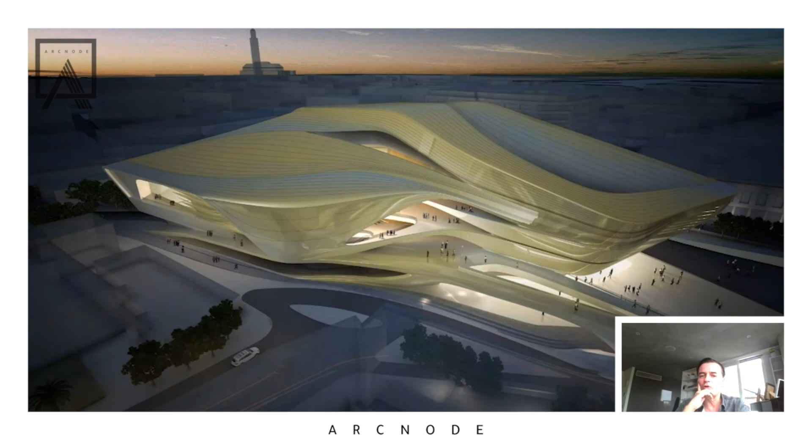So I wanted to start—I suspect nobody would know this project. This is actually in Morocco, a sketch and scheme, a competition entry for a new concert hall / opera house, the Grand Theater for Casablanca. You can see a multi-layered ground, two volumes. You enter at the corner, and the two theaters were located on either side.

So that's just a few sketches. We lost this competition, but soon later there was another. This project actually never happened, and then there was a decision made to move the opera house to Rabat, and I'll show you later that we actually won that scheme. Amazing.

Some glimpses, but also, this is a time when the Middle East had this fantastic renaissance. Dubai was the pioneer nation that modernized in the Middle East, and showed that the Arab world could compete at the highest level with the first-world modern city and society. So at the peak of the boom period leading up to the 2008 collapse, those few years were amazing. So we won the competition for Dubai Opera House, and there is a hotel in the foreground.

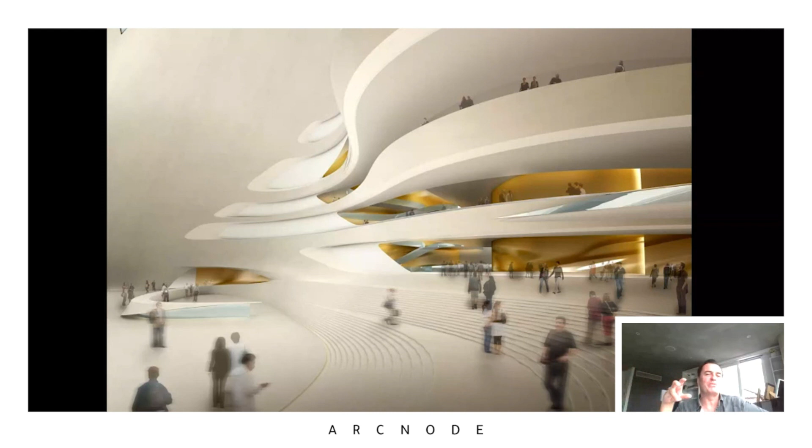So this has been a while ago, and Abu Dhabi next door was also pushing forward. This is actually something which might still happen—this is Saadiyat Island. In the meantime they've built the Louvre, and there's also a new Guggenheim in planning, a Foster building, and this was the biggest of all the new icons on Saadiyat Island. We won the competition for the concert hall or performing arts center with 5 different venues, with a great atrium we put forward—it was the most extreme design with all these terraces, cantilevers, and structures.

But also with a fantastic high-level glazed concert hall, because in concerts you don't need a dark space, you don't need a typical theater enclosure—you could have that concert in bright daylight, and that is our proposal right at the top of that project.

Now, this one some of you might know because this is Petra, and you can see here our interpretation of some of these beautiful erosion forms. Later on you see this form reoccurring, and this idea of canyons, strata, and erosion became the theme for our proposal for the Grand Theatre of Amman.

This is also a concert hall project with 2 halls, and here you can see that big block in the valley, beautifully located, with that fantastic carved-out erosion of that big stone block, which generated a lot of interesting lobby spaces. In this case, we have a smaller concert hall up here and a bigger concert hall partly submerged here, with a high-level lobby with a skylight.

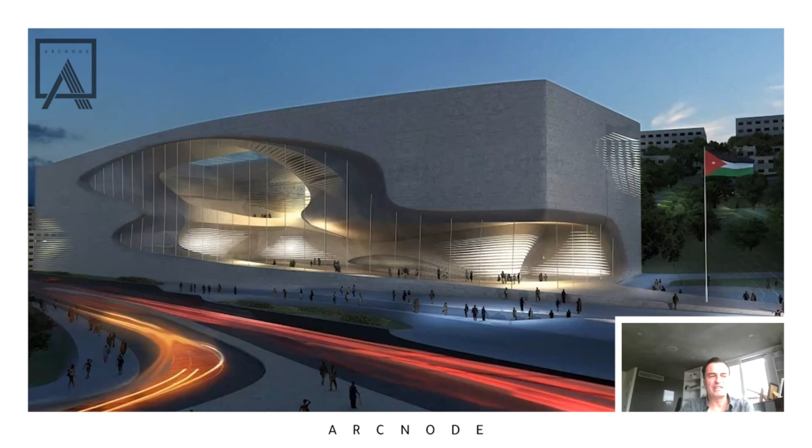Unfortunately, Zaha was very sad and devastated. It's just so sad - if you do a competition and lose, that's one thing, but if we spend two years refining and detailing, working it all up, that's another set of drawings we don't have.

Time to look at, but this would have been the main hall, and this would have been the lobby and the balcony into the second little hall, and you work yourself down. There's a sunken concert hall, which I showed you earlier, and this is looking from the top level down.

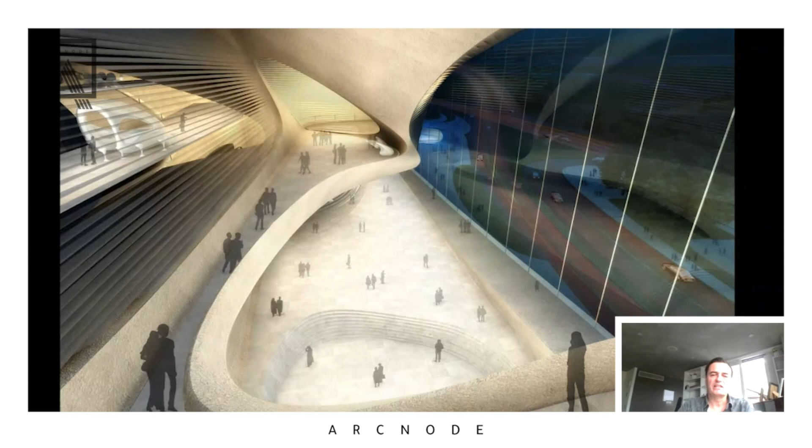These fantastic lobby spaces - so big shame, but a lot of these you'll see more of. The Dubai Opera House was also a shame because we had developed that a lot. Saadiyat Island as well - so a lot of these didn't happen. Some of them might still happen, like Saadiyat Island. This one finally is happening now.

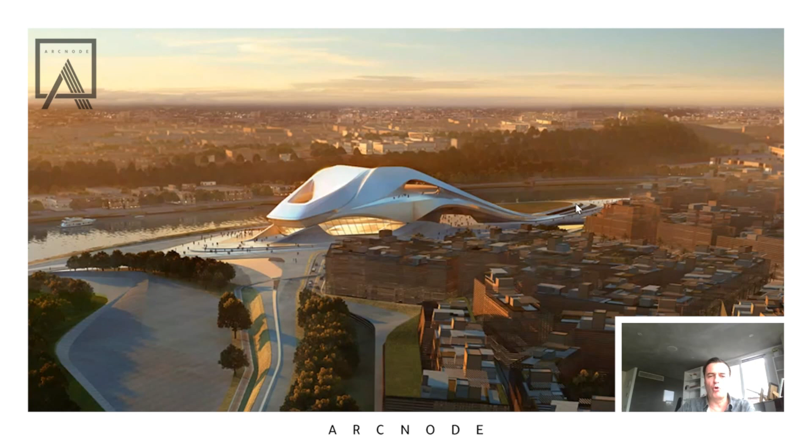This is the Grand Theatre of Rabat, beautifully located on the water. Rabat is a very beautiful garden city. You can see here we have the main lobby entrance, terraces to step out on from the balconies, and actually the stage can open up to the back, with the idea of an amphitheater connected up as well.

Wow, so this is happening. In this case, the theater itself is very faceted. I don't have the latest photos - what I'm showing you now is construction photos, and actually we're a bit further ahead now with that.

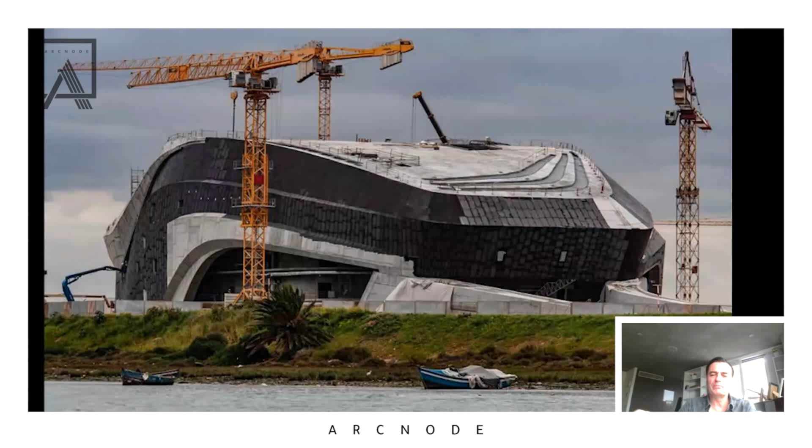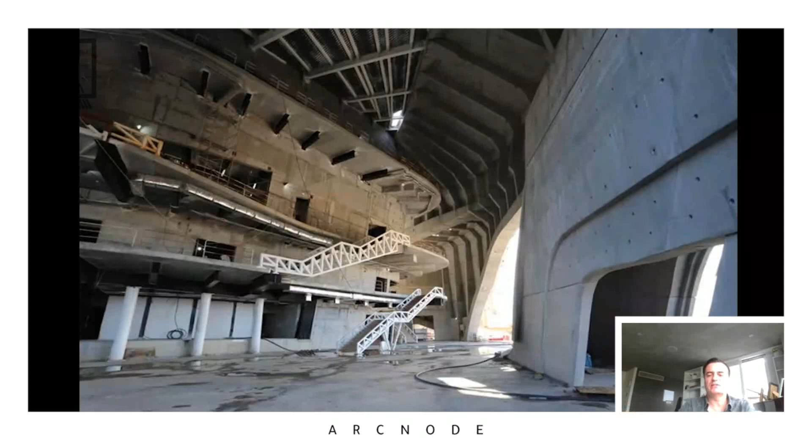There's a mixture of fair-face concrete for these long ramps and structures, and then the cladding is fiber concrete, happening as you can see here. The lobby space with a series of balconies and the great theater space - that will take a little further, maybe over a year, to be finally completed.

Yeah, it will be beautiful on the water. I just threw this in as well because it's the football stadium in Qatar.

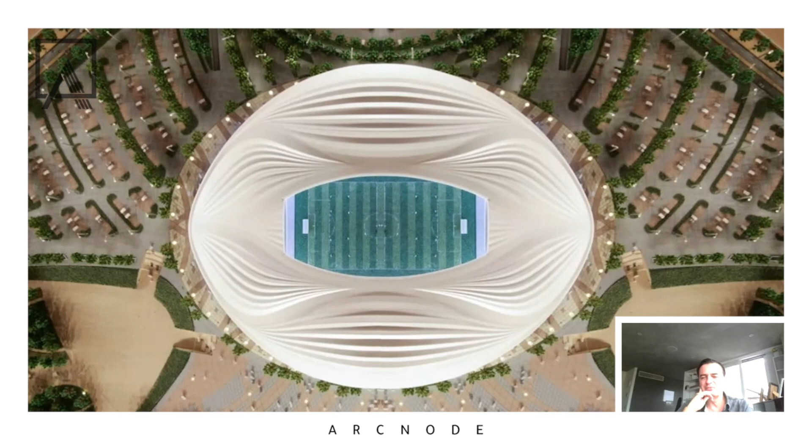So that was the competition design sketches, and then the reality - the beautifully pleated cladding in white aluminum, very beautiful, very striking. And of course it's a big opening, but we can cover that roof. You can see the cables, and you can pull over roof elements there to close it for the heat.

I've been at the opening ceremony and the initial football game already, and you can see here the nice pleating and the mashrabiya patterns at the edge for the lobby area.

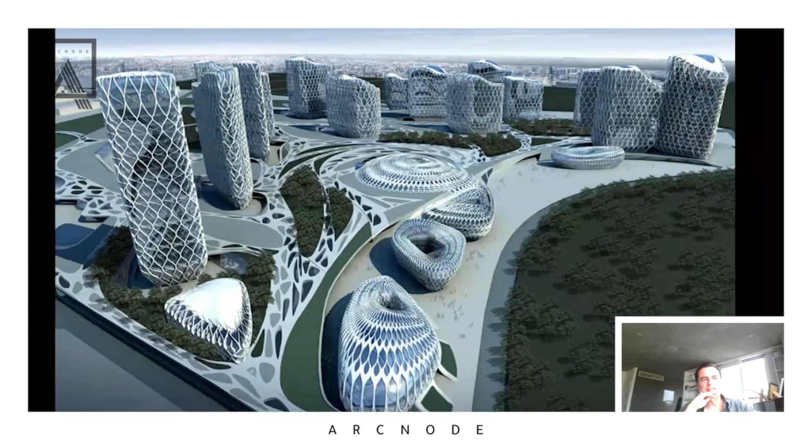So we also did a number of government projects. This was the idea of a whole new government complex in Libya.

I mean, what I find interesting is what happened in Libya and Morocco and Jordan, and also Algeria, Tunisia as well - all of North Africa, I thought, had a fantastic economic spring before the so-called Arab Spring, where there was a lot of ambition and investment. In fact, this was after the financial crisis, which in a way stopped all the boom in Dubai and Abu Dhabi - in particular Dubai, where everything came to a halt. But that was a takeoff moment for North Africa, and there was a lot of excitement. Unfortunately, what I call the real Arab Spring was followed by a political Arab Spring which stopped all of that.

So this is Tripoli in Libya - the idea of a whole government complex. This was meant to be the parliament, with a big dome, and there was a big plate connecting a lot of these ministry buildings. These were other chambers of the parliament, and these towers were all the ministries.

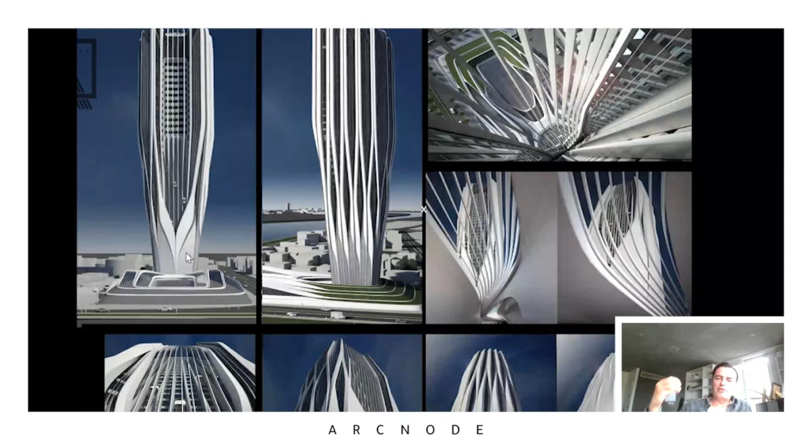And then these structures, the facade, and you can see it down here, is all about shading. In the end, totally shading against the southern light, totally open with the northern light, and then opening up gradually. This is also beautiful, the way you move through the podium and see this tower up.

So I think it's a wonderful tower, and it makes you look forward to its final execution. But we also did a number of sketches for the Iraqi Parliamentary complex on the outskirts with a beautiful garden, and it's part of a master plan with a series of office buildings and a number of parliamentary chambers. There's also 2 main chambers, but also secondary halls.

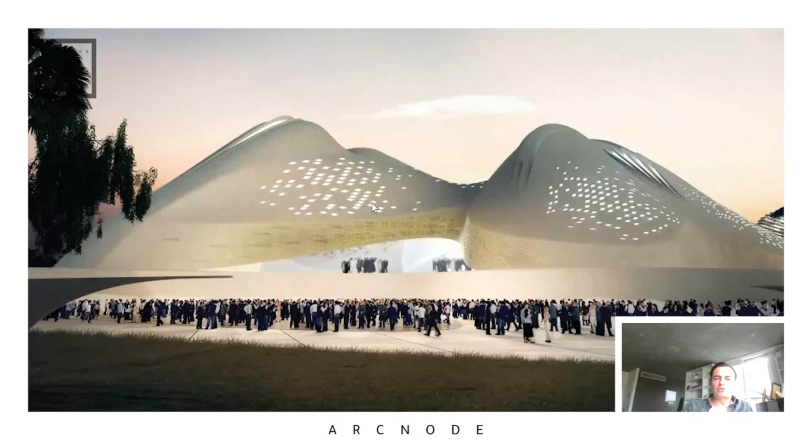And that is our sketch using these domes. You can see here in a larger envelope a series of smaller volumes articulating the different chambers, using filtered light. And this is the way you look at it from the office buildings behind, overlooking the parliamentary chamber.

We also did in Iraq again a competition. I only have one image here. This was on the river as well, on the Tigris. The offices of the Prime Minister.

So something which has some of the axiality and elegance of the government complex, it has traditional features, but it also has a very contemporary lightness of efficient shell structures. And so we did a number of those government buildings.

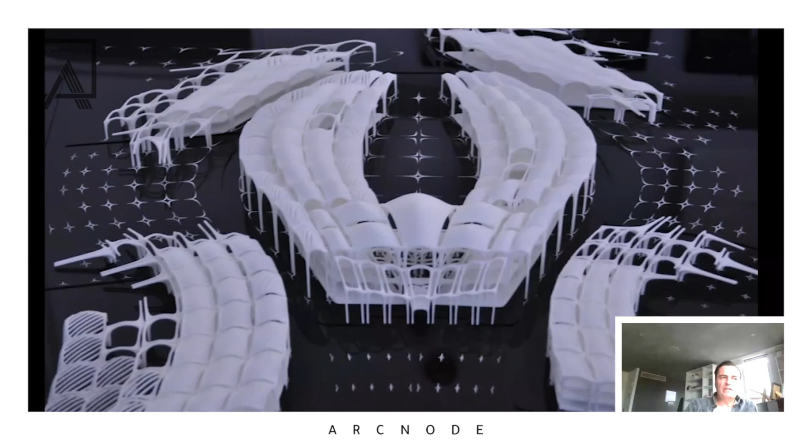This was a proposal for a parliamentary building also for Dubai. It's also built on this idea of layers of shells. Sometimes you find in mosques a whole field of shells and a kind of hierarchy and cascade of those overhanging to the side, to give a lot of shading to multi-story offices behind, and a beautiful main plenary hall with these kind of layered structures.

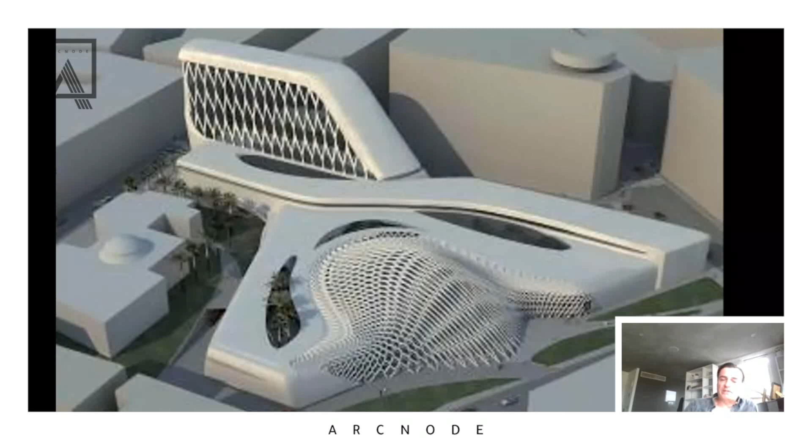So we've done a number of those. We've done this one, we've done one for Tripoli, and I couldn't find now the actual hall. And we've done a beautiful one for Syria. From Syria, I can show you the complex from the outside, but all of them also had the beautiful interior hall. So this is the Syrian Parliament building which we proposed. There's an existing small Parliament building which we connect up to.

This was the ministry offices in the slab, a series of courtyards, series of chambers around, and this was a big dome hosting the actual parliamentary hall. You can see how small this one was, a hall, and then also covering a lobby area in front. Unfortunately, all of these projects didn't happen and might come back.

So I just wanted to show you, out of my archive, what we've done in all of these countries, in what I call the real Arab Spring - and now to make a political statement - which kind of finished, or in a sense was spoiled, by impatient uprisings. If we had actually waited a little bit more, you could have seen prosperity spreading around. But of course, it was an era where you had investment flowing in, and initially, of course, not everybody was participating, and that built up some tension.

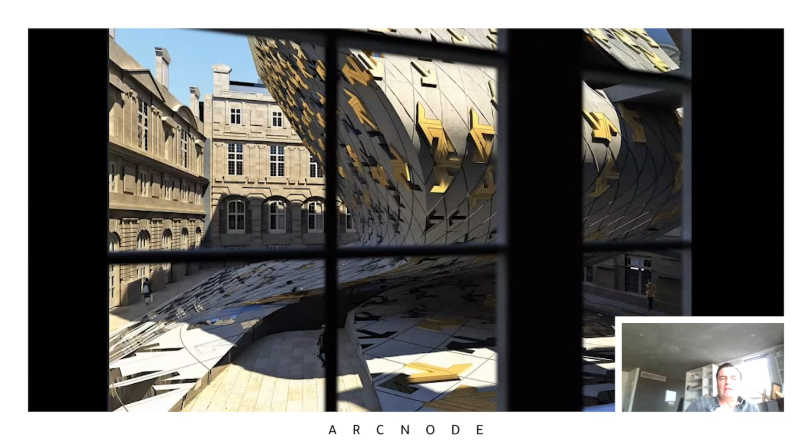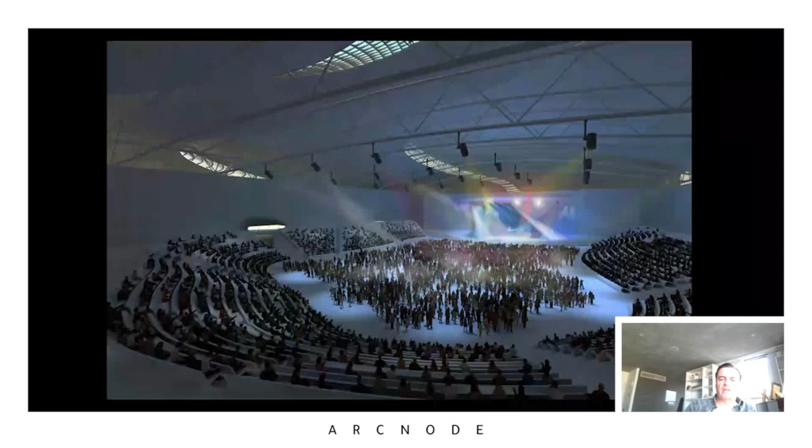And this is some of the images of the Expo City. Again, this was a real project, commissioned, developed beyond the competition. At the same time, we did in Egypt stone towers.

This is part of New Cairo, a very large complex of towers meant to house multinational corporations and local firms, including a hotel and residences, but mostly an office headquarter cluster in New Cairo.

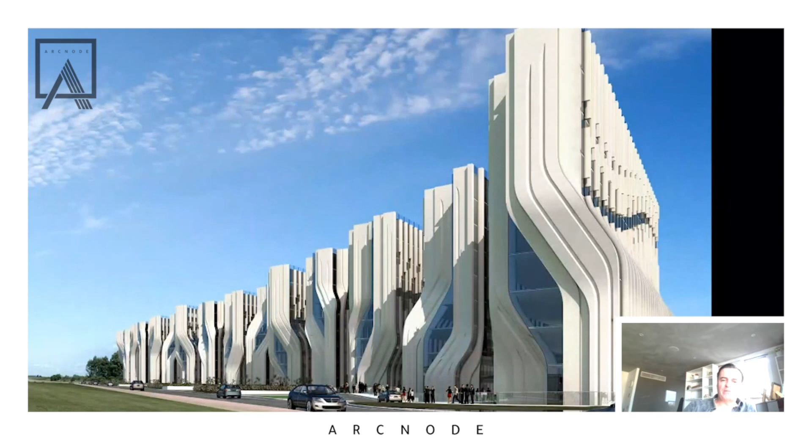The typology is quite interesting. Always two of these slabs come together around an atrium, with a small gap and another two. All together this generates this beautiful frontage.

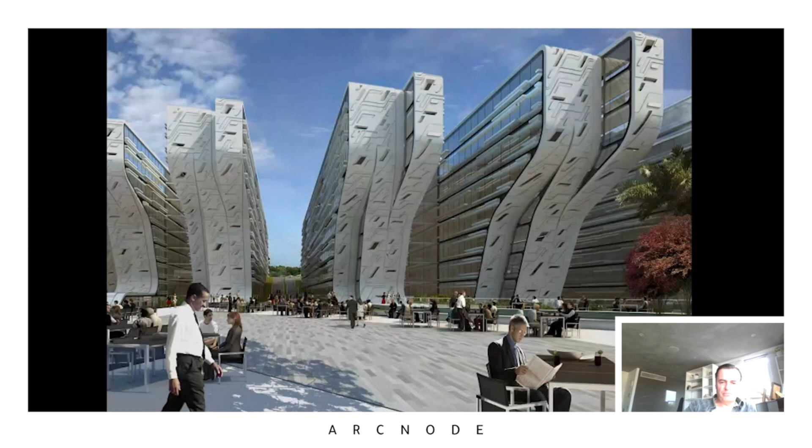Then as you step behind, you move through into the sunken valley. We went down a number of levels to gain height and area, generating this wonderful valley with a lot of retail, a hotel, and office spaces. There's a sunken plaza condition inside, with ramps, balconies, and a lot of outdoor space.

This was at the time the largest project we'd ever had, nearly amounting to one million square meters. This was on a scale we only operated at otherwise in China, where we do very large projects. You can see how far we actually cascaded down to gain height and area.

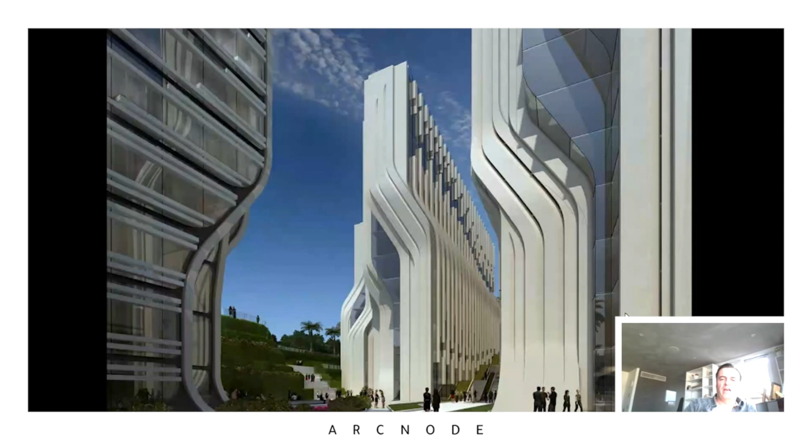This is maybe one of the projects where we've spent the most intense of our design efforts ever. This is the Green Hill of Algiers, Algeria, the presidential palace. Actually, the presidential palace is up here right now, so this would have been the new presidential palace and presidential residence, separated by a garden, a big ceremonial forecourt, and another cluster of ministry towers. It's a major complex and beautiful palace with large halls and a lot of spaces.

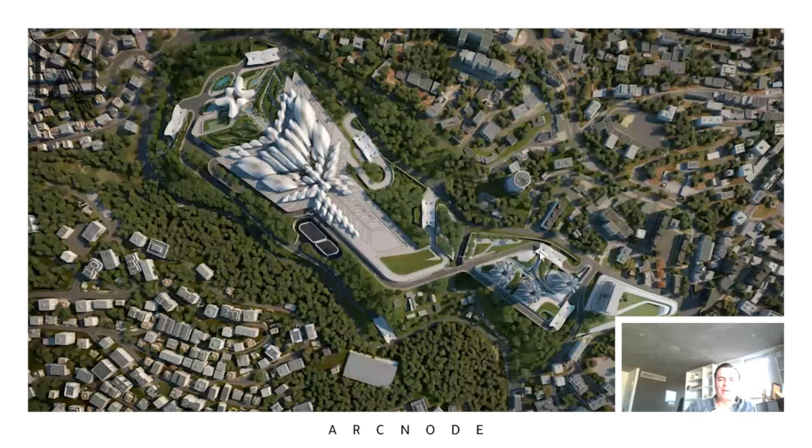You can see it here as well. This is something where we went all out on a more ornamental approach, but these are also high-tech, lightweight concrete or super thin concrete shells, everything heightened to become a beautiful, festive, ornate structure, because the ribbing pattern, which was structurally active, at the same time also became an ornament.

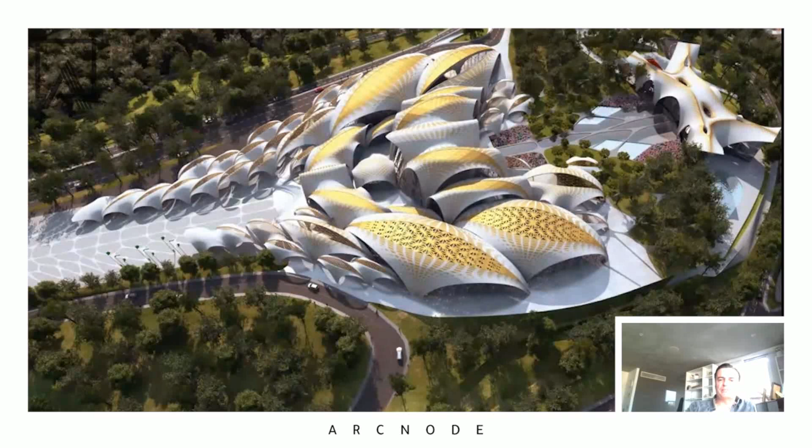Some of these are very large shells, and we left gaps between them to gain some light into the middle, not only at the edges. This structure is the presidential residence.

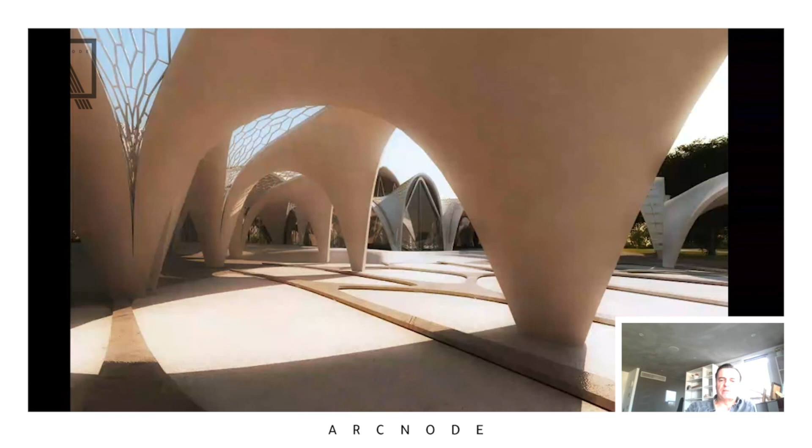I don't have details of that, but this was some of the approaches. You can see here some of the ornamental treatment of the interior and exterior. We had the idea there would be light windows, but also tiling and different color tiles and patterns on the inside. Big atrium, multi-level, with this beautiful feature of the column moving through a hole.

This kind of cluster columns you find in Gothic cathedrals. This was an unbelievable effort in terms of 3D complexity.

Some of the cruder earlier versions of some of the spaces show you how we tried to vary the tectonic elements, but as always the ribbing flows and channels the forces to the support points. You want to generate a sense of lightness, and in terms of the big glass areas, the reinforcement was following a geometric pattern.

Looking at it from the back side, from the vista, the residence also had a beautiful top level courtyard.

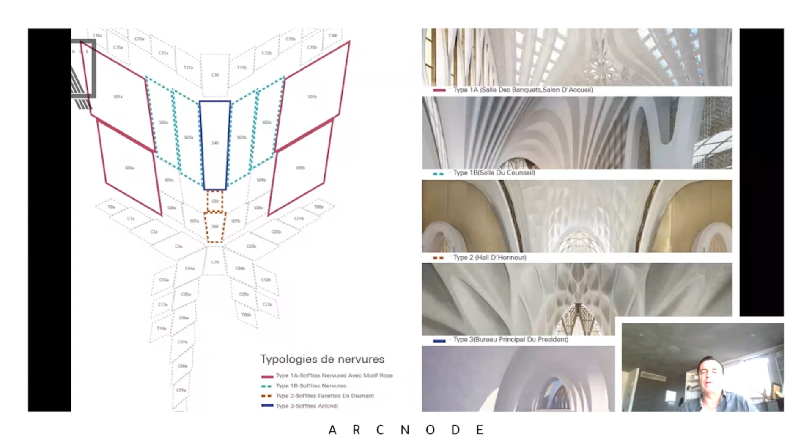This is about the facade, the facade overhang, the relief of the facade structure, and as well shading elements.

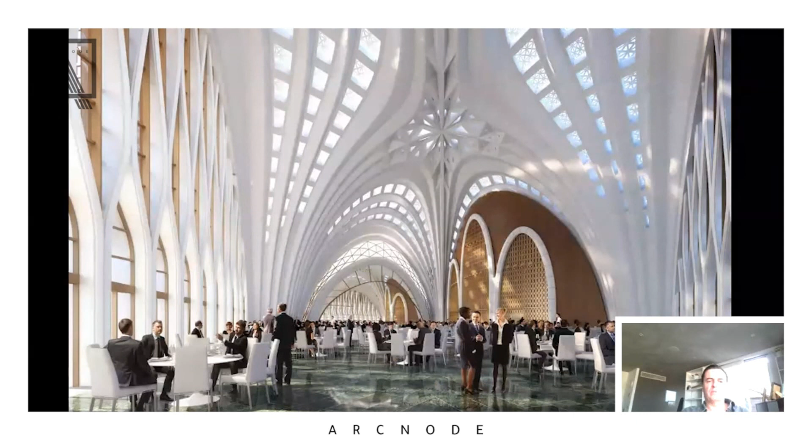You can see some of those spaces and the main hall, the way the shells were connected with glass. And this is the main atrium, circulatory atrium.

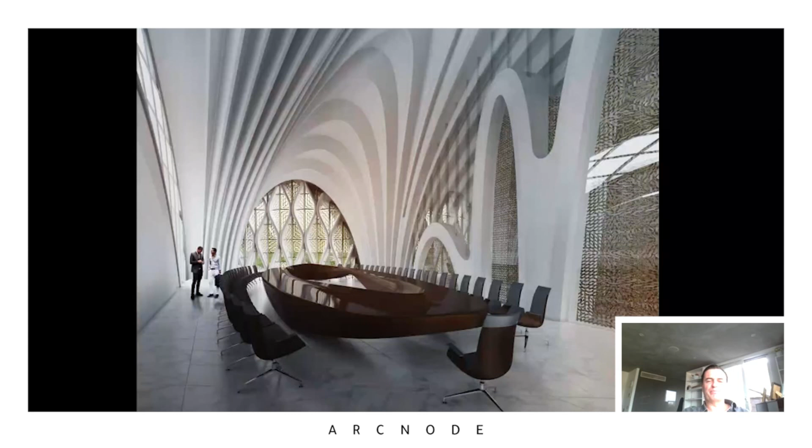So we went all out. Every single room was detailed in this way, including some of the furniture. This is a big conference table. We detailed it out with the concrete shells, the cladding, the glazing, everything ready to go as well.

Unfortunately, the president passed away, and in his later years when he was very ailing, we never got the go-ahead with construction. Sadly. So one more of those. Now I just want to show you also a few towers.

We have proposed this one in Tehran, North Tehran. Unfortunately, in Tehran the political conditions are not very good, and Iran is facing a lot of sanctions and restrictions, so we couldn't do this one.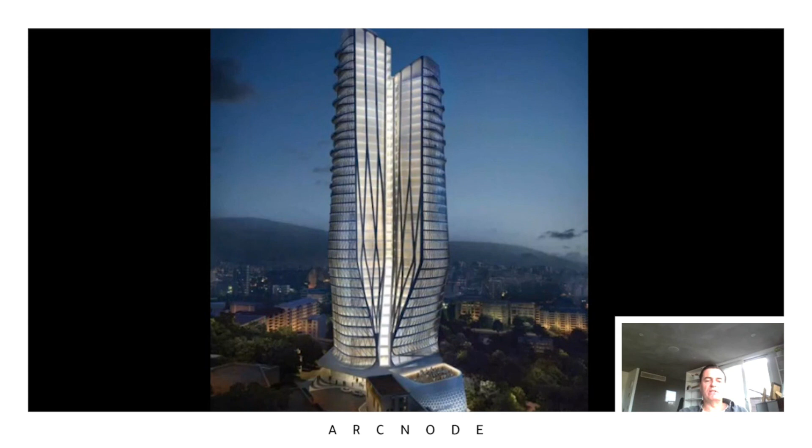We won another major tower complex, also in Tehran, and we did this when there was a window for a short period where there weren't any sanctions. That's for a private client, very close to a beautiful park next to the Russian embassy in northern Tehran. This is actually going ahead, happening now. It's a very tight, very steep site - a hotel and residences with a retail podium, which will go forward.

Our other Iranian project didn't happen. In this one it was also difficult to stay on top of it, so we're relying on local execution, and we can't receive any money from Iran, so it's a wait and see whether it will actually be true to our design, whether we can own up to the project or not.

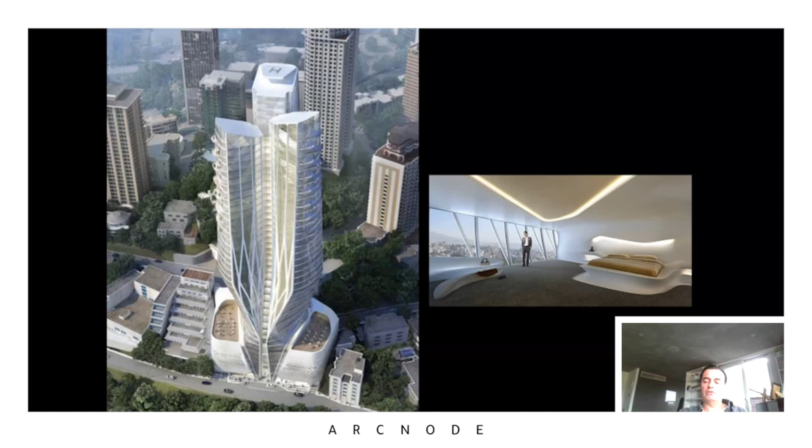We've done a number of schemes, and many more. The way it goes with firms like ours, what we're building and what gets known to the outside world is just the tip of the iceberg of our work. There are many more projects we've done for Qatar, for Saudi Arabia, concepts for Abu Dhabi, etc.

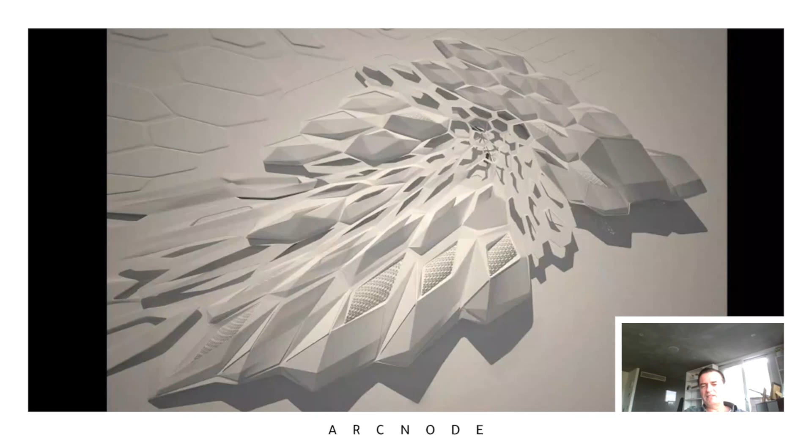This is one you know has happened - a beautiful research center in Riyadh, the King Abdullah Center. I just wanted to show the models we created, and you can see already here that the tilted courtyards shade against the south, bring in light, and capture the wind as well.

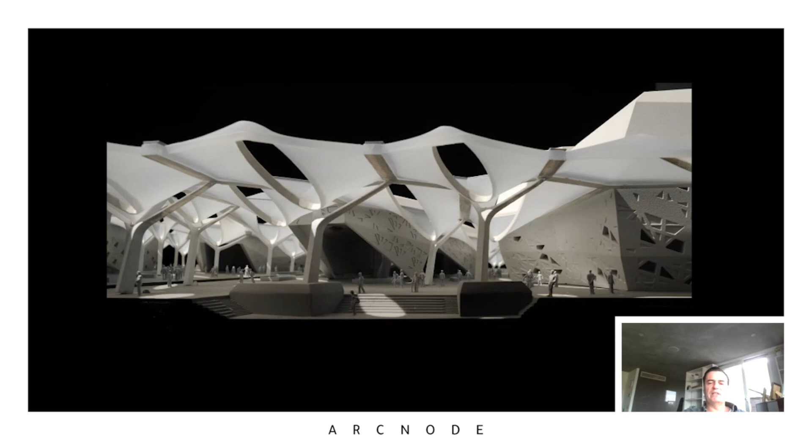And then we have similar features with the canopies. So this was the idea of keeping out the light and bringing in the wind into these courtyards, and then staggering them in height. And then the similar tilting of the oculus and all the shading elements so that the wind flows in and the sun stays out, which unifies the image across the tensile structures and the solid structures.

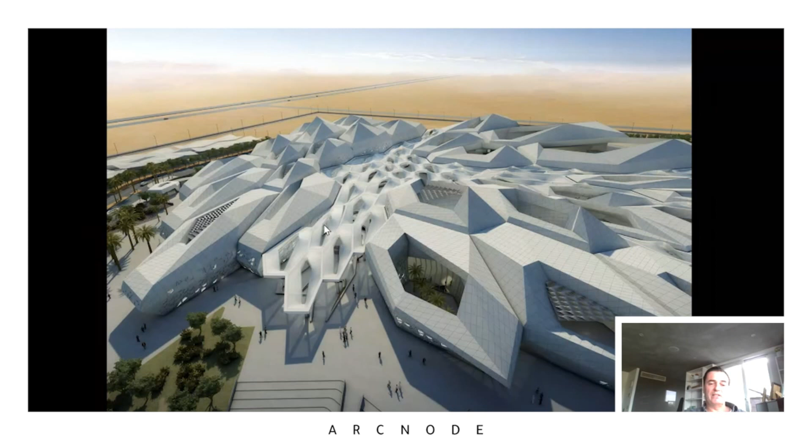And every perimeter facade has deep cut small windows. So all of these are also windows, but you will not have any solar gain reaching into the buildings through that.

So I think it's a very successful project. I've been back a number of times, gave a lecture there. We had the Saudi Design Week event here as well. So it's become a major public building in Riyadh.

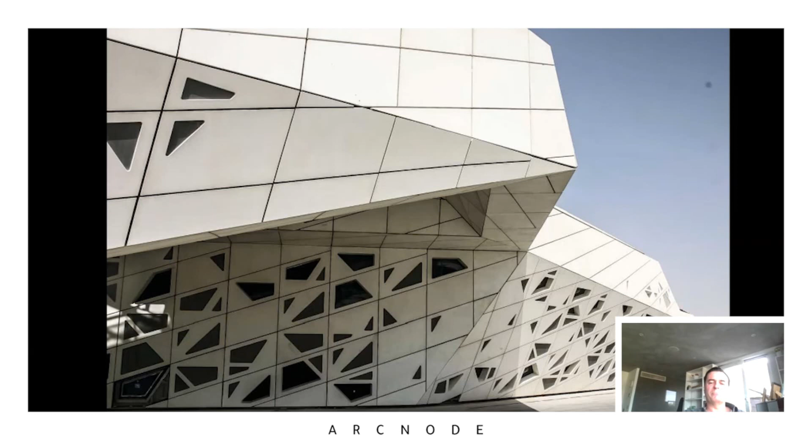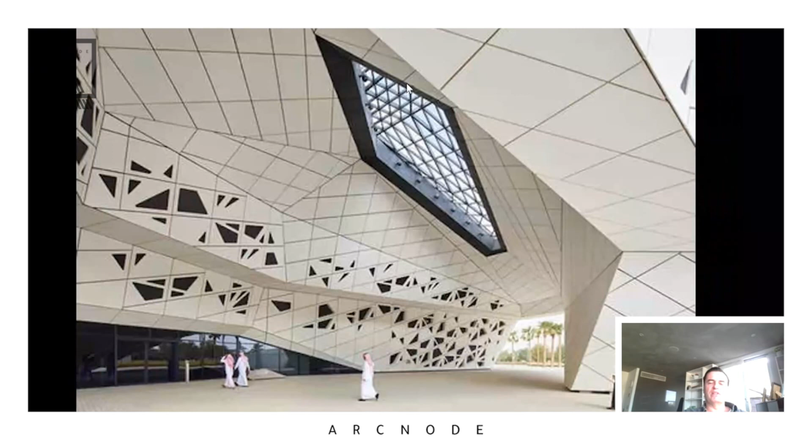So this is some of the entrance situations. That's where you can drive in, drop off, kind of open with a skylight for the entrance. This is where you walk in between some of those volumes underneath the canopies. I'm pausing here, so you can see that some light is coming through.

Very nice picture. Thank you.

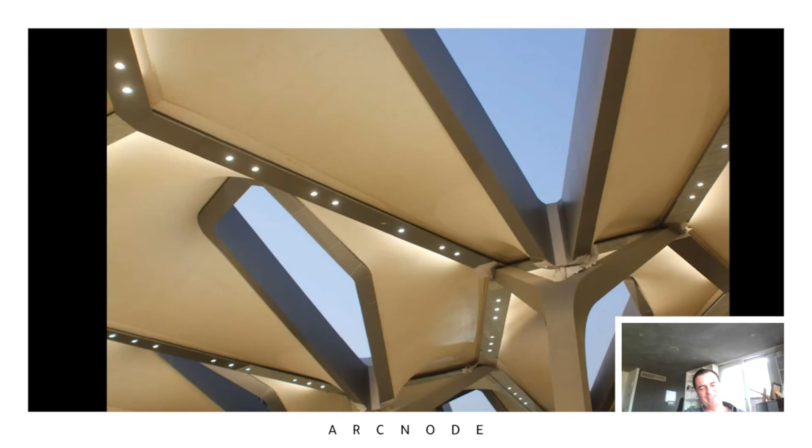And it's so nice. So this is also kind of tensile, it also shades. This is a very geometric building, but you can see the climate imposes something which makes it regional in a way, and also the use of tents and tensile structures localizes it. So that's kind of parametric regionalism, but also tectonism in the sense that it's driven by environmental engineering logics, which impose parameters to translate those pressures of sun and wind into the morphology. So that's what I call tectonism as well.

So it's not only form making, it's form finding on the basis of, for instance, structural logic sometimes when we do the skeleton buildings, but also environmental logics, fabrication logics.

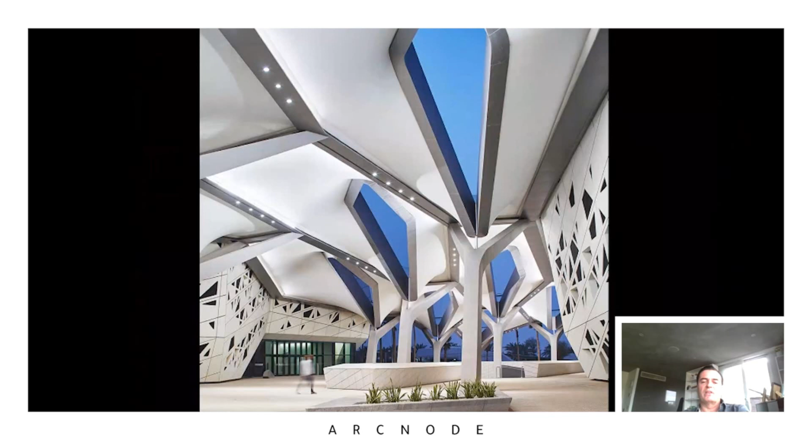So it's beautiful outdoor spaces. They get a lot of ventilation through all the openings in the roof, but also the gaps between the buildings, and a lot of shading. It works very well. We were happy with that result.

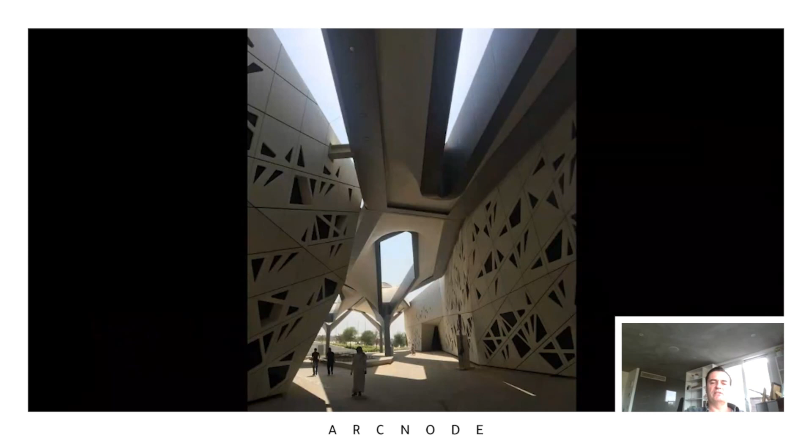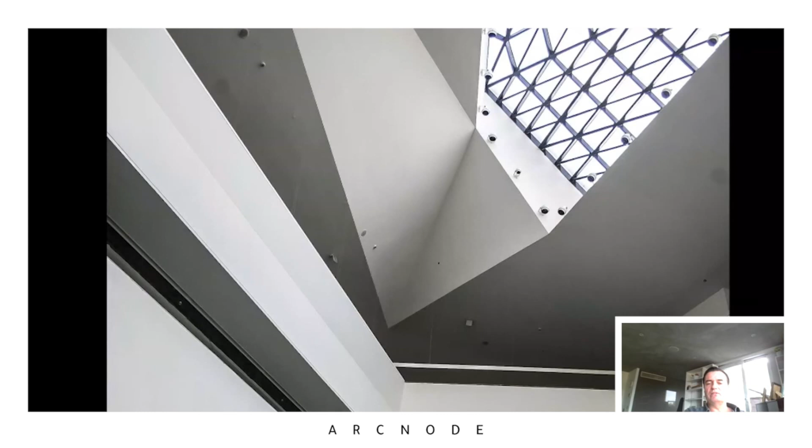And then inside you also have these courtyards, and they're also very useful to bring light on a very deep structure, and also to step out to get some fresh air sometimes. And we have a lot of atria as well. So some of these shapes are covered courtyards, atria, or they are outdoor spaces you can step into, like this. So these are the outdoor courtyards, quite beautiful.

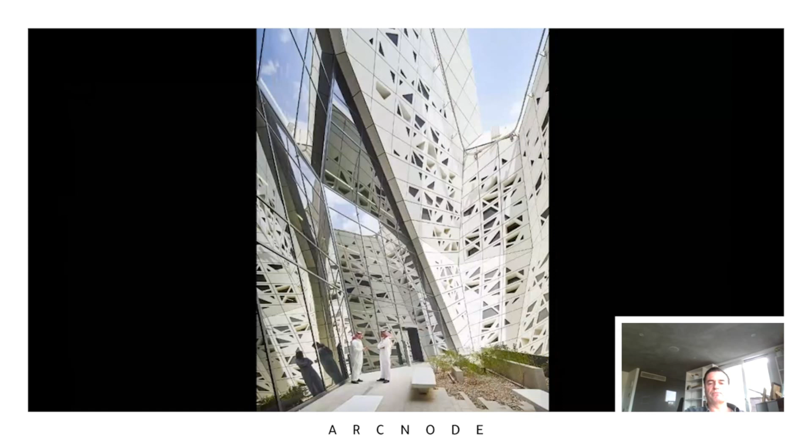And we also have a religious space. So we have office spaces, we have a conference center, a library, and we have the prayer hall as well.

So I wanted to show you a number of mosque designs. And the idea here is to have something uplifting, beautiful, like a religious space of contemplation and prayer should be, but also uses traditional features maybe, and things like domes, but it's also very contemporary. So it's a kind of 21st century vision of a mosque for modernized Islam, and so that was our contribution.

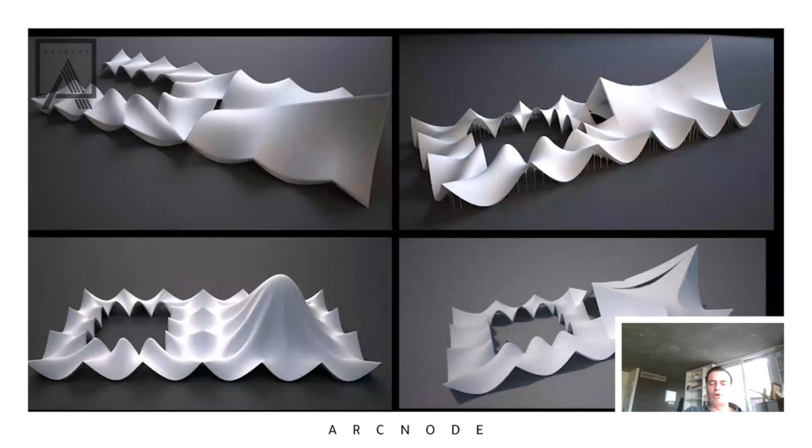But the typologies are of course very typical, with a forecourt with a series of arcades, and then the main prayer hall. So this is some of the model sketches. We generated different versions of that, and this is the way it was located, and I think it's in Dubai.

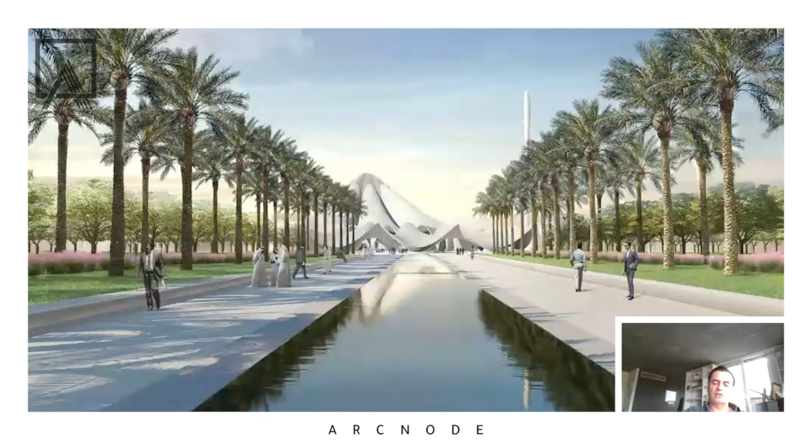The courtyard, the main hall, and a lot of shaded zones, and there's this kind of approach obliquely at an angle with a water feature. And so this side could be totally open to come in. There was also a minaret, and so it's the main axial view, and the way you step in.

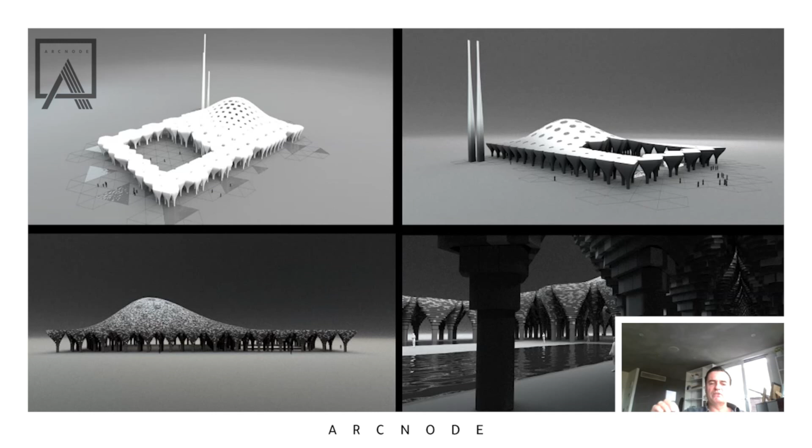And we thought this kind of light is kind of like light breaking through the clouds. Beautiful. So then we did the second version, which was more solid - actually where you can see the grain maybe of a brick or stone.

And it was using parametric methodology to develop all the geometries. A very similar diagram, but different architectural articulation. And we can have a double minaret. So this is another version.

A bit more austere and simple with the edge and dome. This idea with trying out the lighting at the bottom of these columns - there's a kind of weaving column pattern, which became kind of generate the solid edge. A similar diagram, also very pretty, with some openings to bring light.

And with the water feature surrounding, you can see this kind of intersecting lace of structures which generates the pointed arches which originated in Islamic architecture and became also a feature of Gothic. And this is the idea of these kind of layered

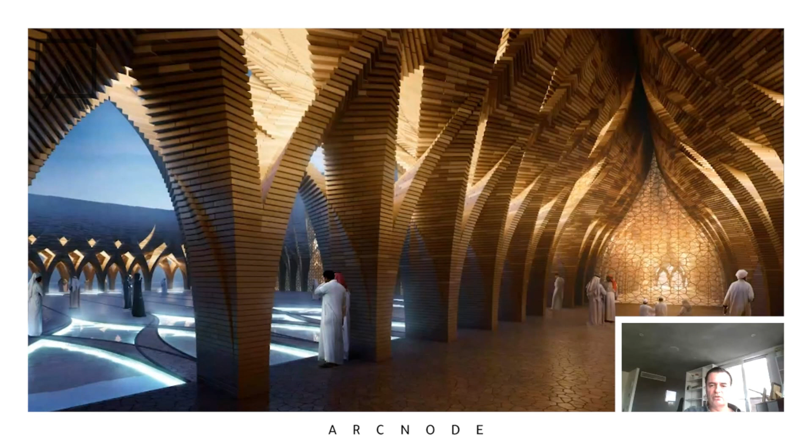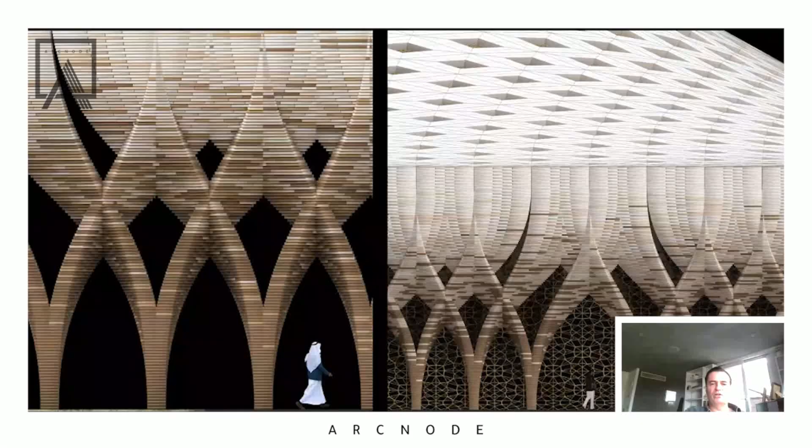stone pieces. So it was a material idea of this, and that's the way the open arcades feed into the closed edge of the prayer hall. And this is the main dome hall, and some detail of the idea of using stone, layers of stone.

So they didn't like those yet, they wanted more. So we did a third option, which was this kind of beautiful, pure, slightly pulled dome - looks like a kind of Saturn with this ribbon or arcade piece as a big oval, with a lot of depth here, and a slightly smaller courtyard, but a lot of light coming through. This is the way it was sitting on the axis, and I think it's very pretty.

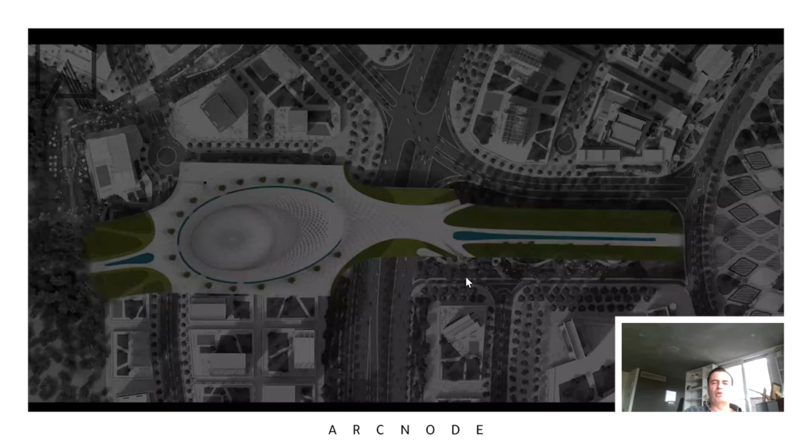It's a very lacy, elegant piece, and also with a lot of calligraphy on the whole wall, and then the structure filtering through. Stunning. Okay.

Some of the details, and then we also looked at the lighting pouring through, there was through the perforations as well. So that's still parametric regionalism, but hoping to have that beauty and also become recognizably a mosque for also more traditional users.

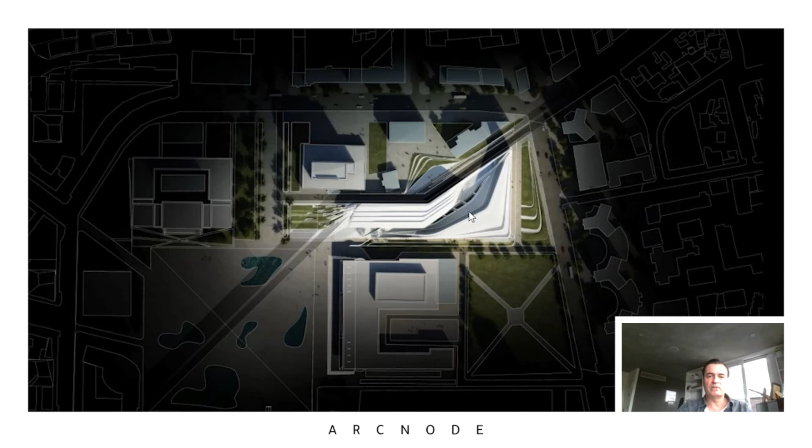And this was a complex site, with a kind of unusual form. We generated a courtyard, and this part became also a mosque, a very unusual mosque. I think it was Mecca in this direction. So I'll show you later how this works with the minaret, something really like an urban block. And this is the prayer hall here.

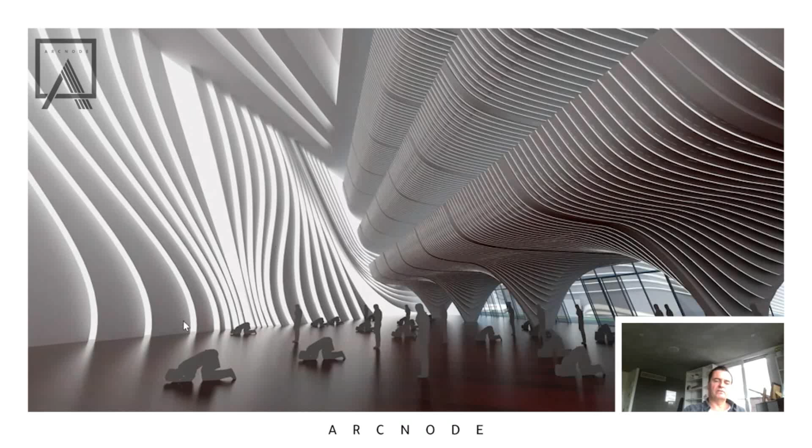At the corner, a lobby space, multi-level lobby, and that's the idea of the prayer hall. So this is some of the balconies, and this is the idea of that hall, which is kind of wedge shaped, and then behind again the kind of quite contemporary feeling circulation space. So that shape is very unusual for a prayer hall.

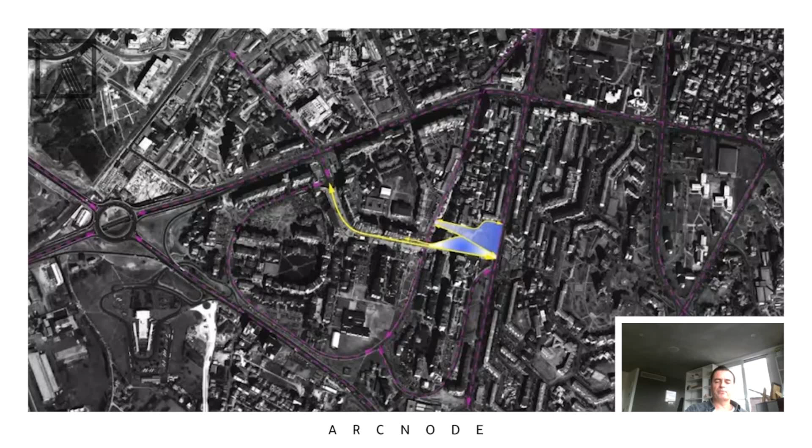Now this is Pristina, Kosovo. It's a very messy city - well, like many cities are around the world, all cities nearly. And here you can see a little bit, I'm sure you can see the minaret and the mosque.

It's an urban density, you're coming closer, and so the idea was kind of fluid. You start with a big dome, which is made out of many smaller domes, and then they kind of pour out, they melt out to invite people in and create these kind of arcade-like structures. And this is another one, and you can actually pass through here, so this becomes nearly like a bazaar or public space as well.

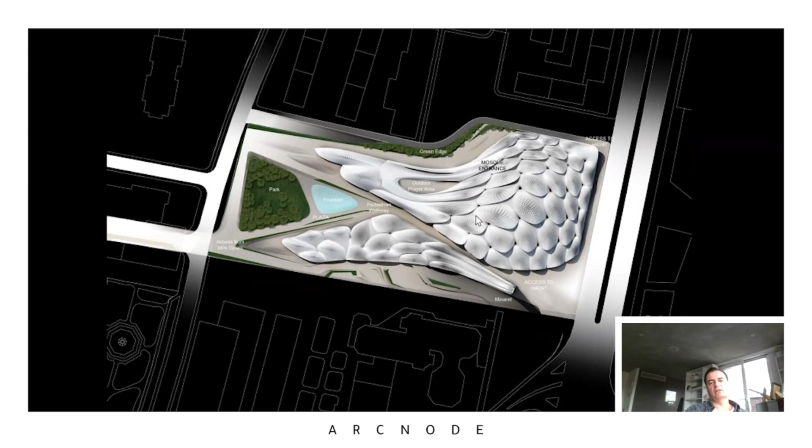So this is the idea of these domes - you can have columns, the minaret, and some elevational views of this. So it's like a swarm, quite like a swarm formation of smaller domes clustered, and you get light into it through these.

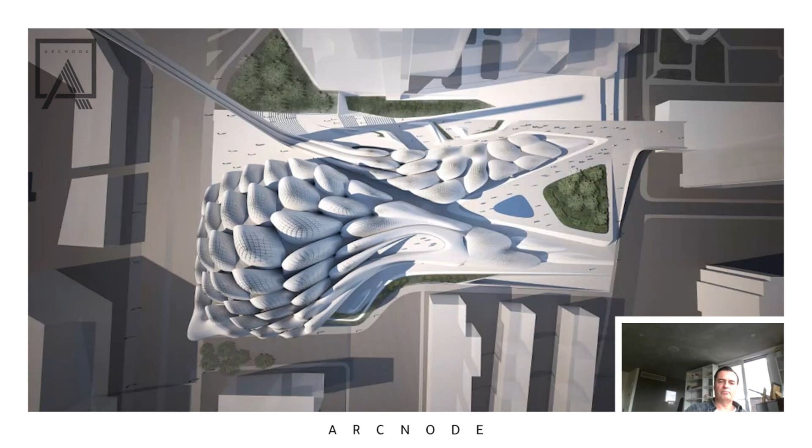From the top - quite sketchy at that time still. You generate these kind of domes and carve out courtyards, and that's the way you approach it.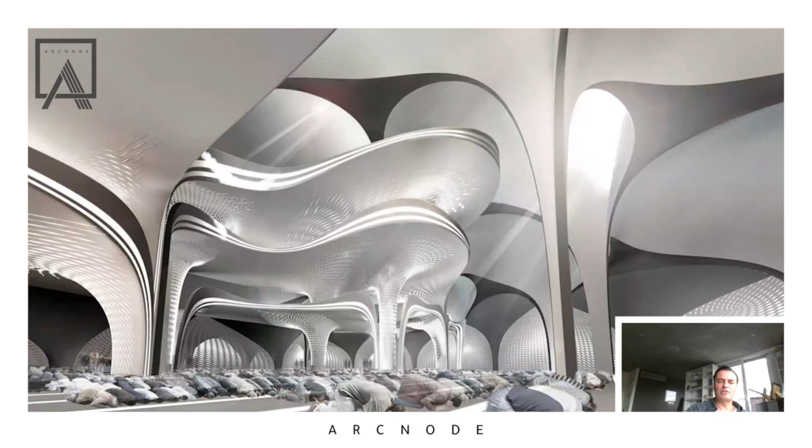So enough of that - that was some of the religious projects we did, I mean mosques. We've actually done more, even one in a European city. We had done an earlier version in Europe, one in France, and a sketch for one in Scandinavia.

This is happening in Riyadh, I'm sure you're aware of that. This is the metro station, from the airport, the main stop at the new CBD cluster. So this is the idea of these kind of dune forms, and then the ripples on the dune as a reference.

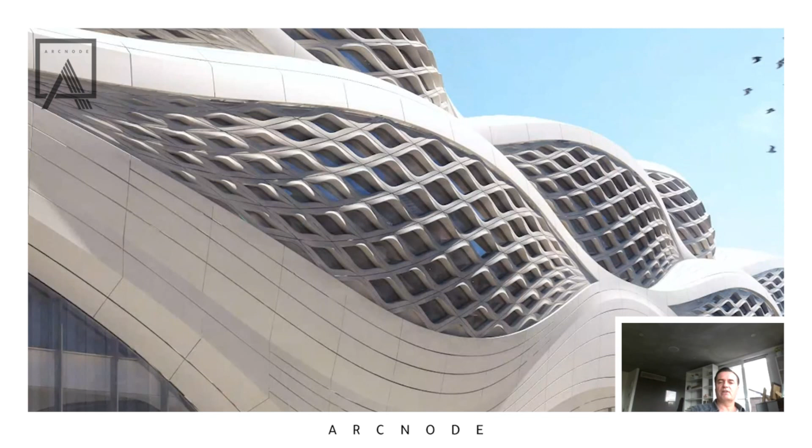You get these great windows, and there's a lot of shading but also a lot of light. So it's a bit like a railway station, which used to have these fantastic vaults and a lot of light coming in. Here that light can only be coming more laterally because it's too hot for direct light. Inside you have these big windows and these very big multi-story spaces, and the trains are coming in also at high levels.

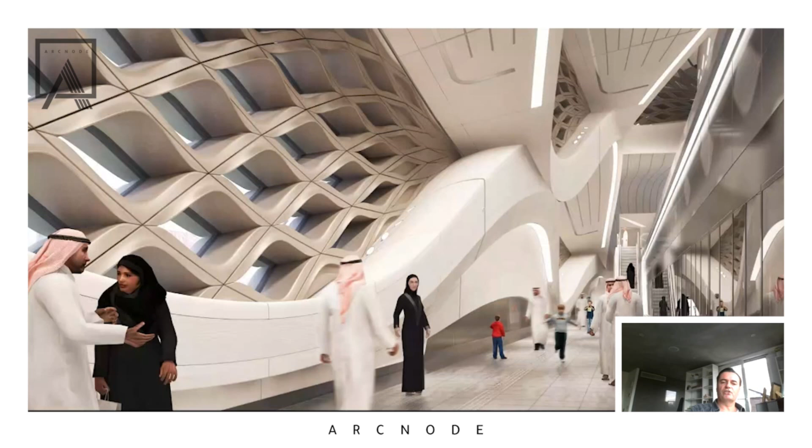This is the overall steel structure. We did the tracks and escalators aligned with the structure, so these kind of diagonals are both circulatory and structural. We didn't want any vertical columns, and that's the way we detailed out these beautiful swarms of windows.

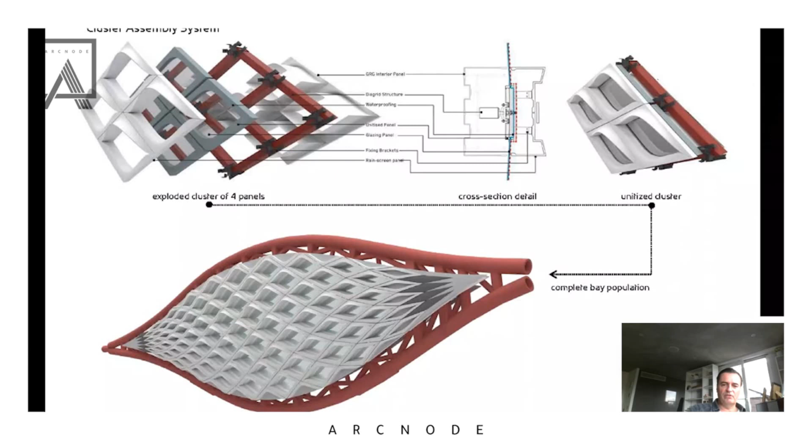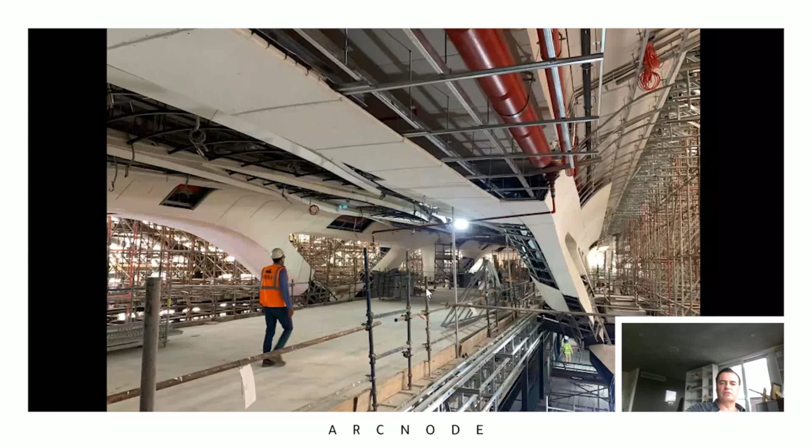This is me visiting the site halfway through. We're much further ahead now, nearly finished on the outside, and some of the spaces on the inside - the platform, the canyons of light, the diagonal structures. It's going to be an amazing 21st century railway station, but it's a multi-level metro with 6 lines coming in and out.

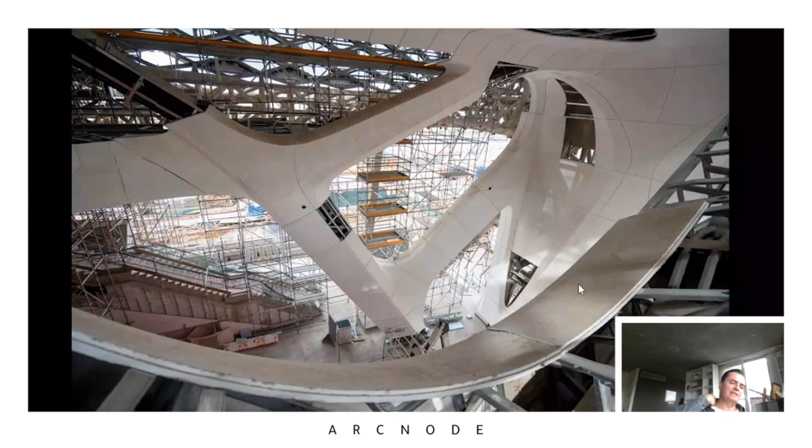And very tall atria as well. So it's very complex - it's all GRC cladded steel, and on the inside it's GRG. So we've perfected the technique.

So this is something also very beautiful, which we won the competition for. In Riyadh you have the old city Diriyah, which was this fantastic mud or clay built traditional city, and they're renovating that, making it a tourist attraction. Saudi Arabia used to be very secluded, you only had business travelers, and even we, for many years, never went to Saudi. Recent times I've been many times, and they're opening up. So this is part of that - this is a museum and visitor center for Diriyah, sitting at the edge.

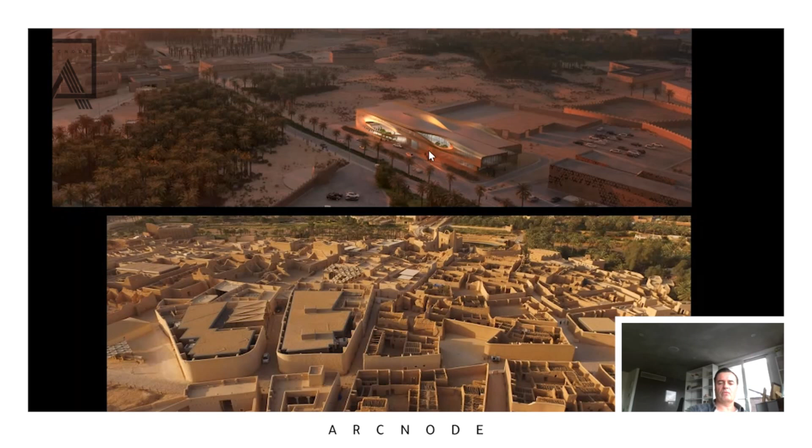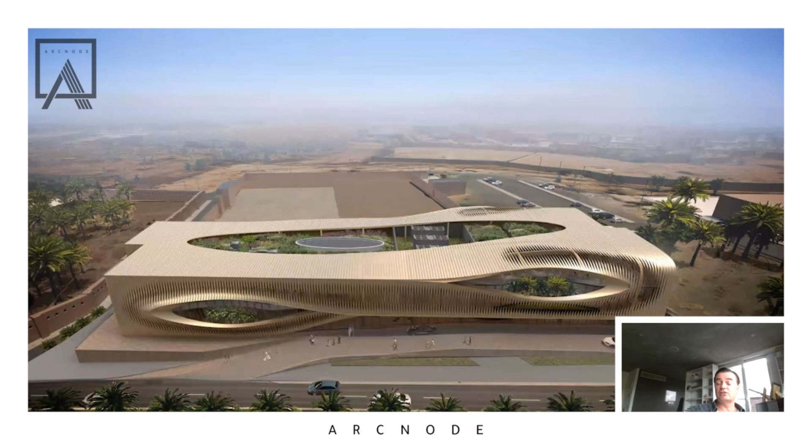We wanted it to be contemporary - it's kind of a dune formation. It has the big roof garden and these big, let's say, terraced gardens where you can step out of it, also filtering the light, and otherwise it's relatively solid, but it's all louvered to filter the light in, because it has also office space, not only exhibition spaces. It has seminar rooms, it has a restaurant, and we've detailed it with these.

So there's a steel frame structure, and then these are solid louver elements which span all the way up without getting any connection. So it's quite well detailed, and then at the ground you have a lot of the public spaces.

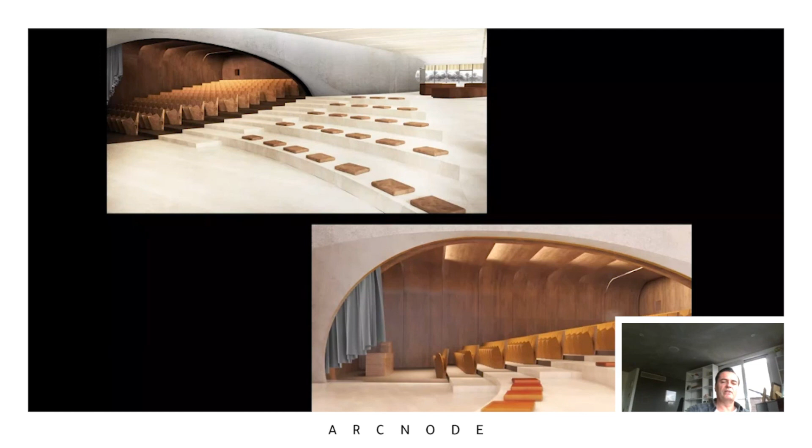So we call these kind of hanging gardens, or suspended oasis spaces up in that. And then we developed a lot of the interior with this beautiful atrium staircase, and the ground floor is following the topography, so it's not flat. So we have this kind of terraced lobby, and it follows up. There's an auditorium which is half open, which is also quite nice.

So you get some intimacy, but people can still participate from the outside - there's no separation. And some detail of that - there's a skylight above that staircase feature, which is at the same time a structure. So it's a kind of concrete structural element, which is at the same time the atrium and staircase.

This is a fully detailed project, a wonderful project in Sharjah for a wastewater management and waste management public company. It's out in the desert, so there's nothing else here for a while. Later on we'll work on a master plan and build around that, but right now we have the beautiful silhouette of the building against the horizon, with literally nothing else but soft sand dunes and our building fitting in.

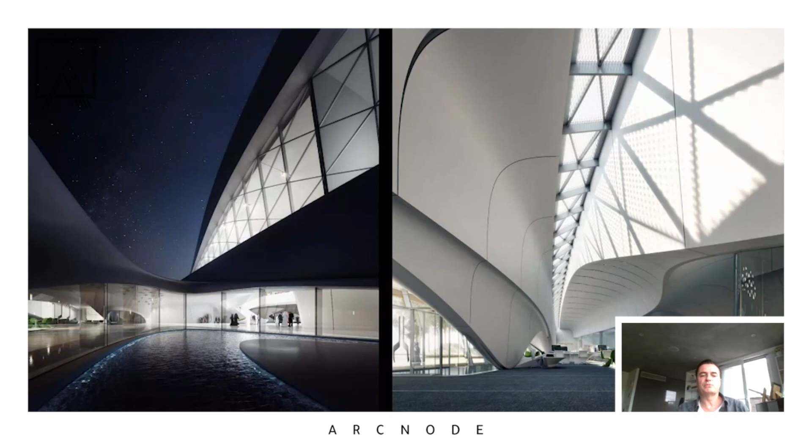So this is the courtyard I was talking about, and this is the skylight for the open office plan. These are some of the images under construction - there's a fair-face concrete dome lifting this up, and a big window here.

It's a steel structure, steel and concrete, with fiber concrete cladding. In these joints we'll have little LEDs, so there's going to be beautiful, soft light coming out of the surface as well.

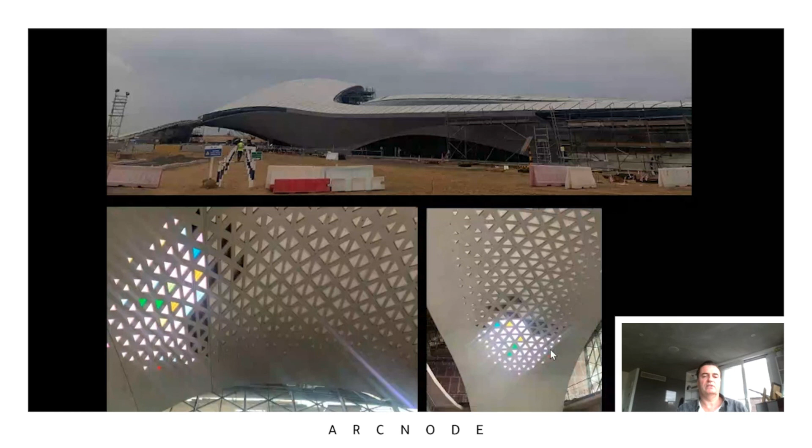Finally it just shows - I think this project has Arabesque features, it works with the landscape, so it is regionally specific. And finally, with Dubai we always felt it makes less sense, since Dubai is a very global city, so we're doing a kind of global iconic building there.

We want to finish with this because we just finished this project, which was the only project that survived the 2008 crisis. We started it in the boom era of 2006-2007, and it was the only one that wasn't stopped, though it proceeded in very small, slow steps until we finally got it finished.

It's a very interesting, complex, multi-use building. There will be apartments up here, most of it is offices, there's a hotel, service apartments, and retail. So it's an interesting mixed-use building with a nice facade.

You get this beautiful facade with a soft silver fritting to play with light reflection, and also interesting LED lights in the surface here. There's an atrium, and I think it's quite successful and iconic.

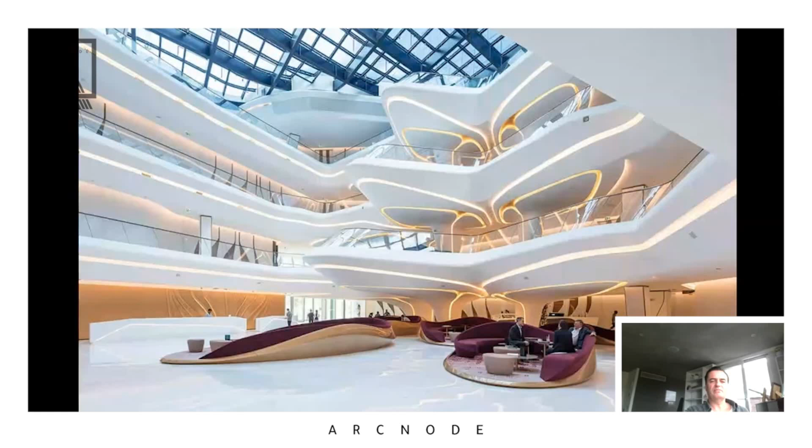Some of the details - and it's beautiful that in our projects we can oftentimes, and always aspire to, do everything from the envelope to the spaces to the detailing of the interior surfaces as well as furnishings, and that's also with respect to the rooms. So I leave you with that.

Maybe I'll stop sharing and we can have a discussion.

Thank you very much. Thank you so much. Thank you, these are some amazing projects, honestly.

I do have a question regarding the Stadium of Qatar. You used the mashrabiya and traditional patterns in the lobby area close to a parametric approach, encouraging the use of ornaments in design details. When do you feel it's appropriate to use them, and what shapes or references do you usually use to inspire the form of architecture in the Arab and Islamic world?

Well, we're quite eclectic. We are not historians, so we look at images and books and do these kind of intuitive translations, like an artist would, through imitation, through manipulation, because I think this works through an intuitive sense of belonging into a region. We're rarely very specific - the whole region has that flavor and feel, and the people roaming around in that region too. So that's the way we do it, intuitively, through visual imitation, visual play.